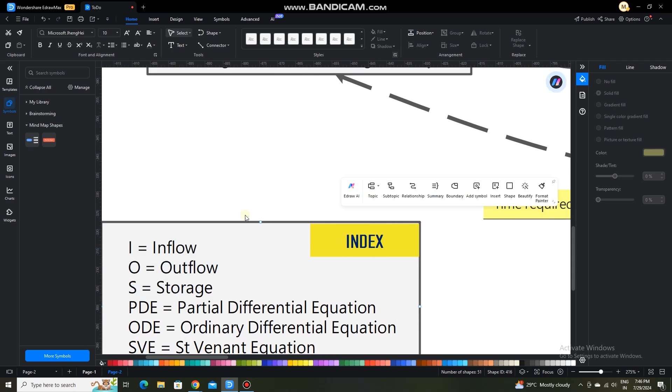And in this case, what we have also derived is the Muskingum equation: S is equal to K within bracket, xi plus 1 minus x, q. Actually I to the power m or q to the power m, that m is replaced by 1, which is normal for a normal catchment. X is your weighting factor that you decide, and K is the storage time constant having a unit of time - basically the timekeeper. So what is done is to put the value of K, value of x, value of I, and value of q to get storage, S.

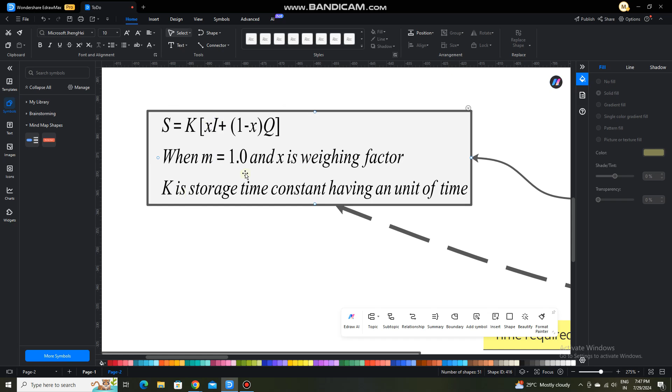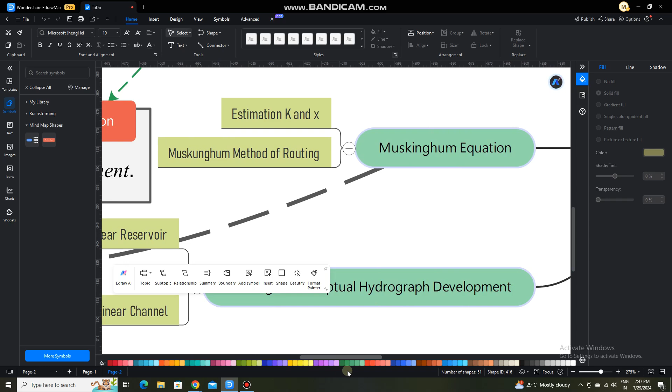So this is the theoretical discussion we have covered, and next is routing in conceptual hydrograph development. For this, you assume that all reservoirs are linear and all channels are linear.

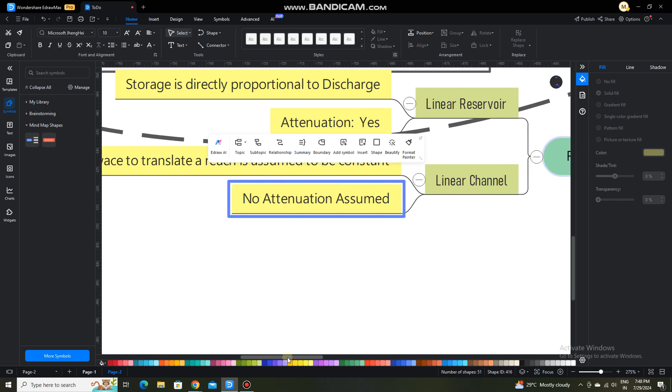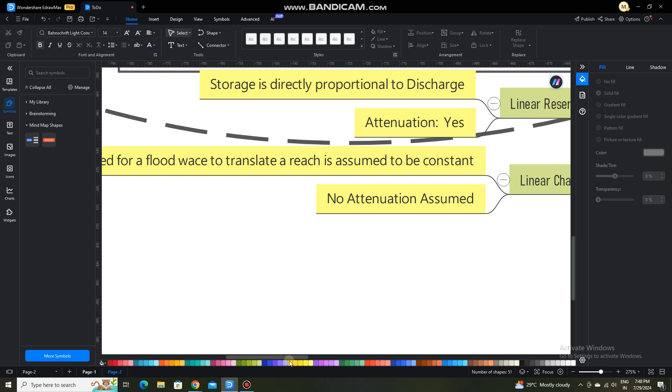If they are linear, then storage will be directly proportional to discharge. There will be attenuation in case of linear reservoir, and in case of linear channel there is no attenuation, only translation. That means the time required for a flood wave to translate in a reach is assumed to be constant. So the time is also made constant - not only m, the time is also made constant, and the k variable depends on time.

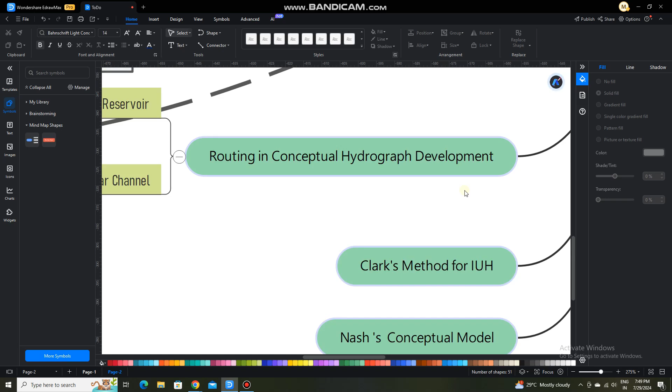In addition to this, there are two more classes or categories: one is Clark's method of IUH, which is instantaneous unit hydrograph, and Nash's conceptual model. So these two, and also how routing is done with the help of the Muskingum method - these three I will take up in the next class.

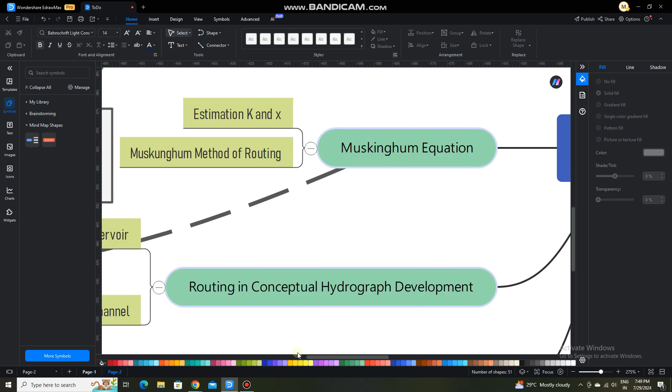So let us see what happened. So for now, this is the case.

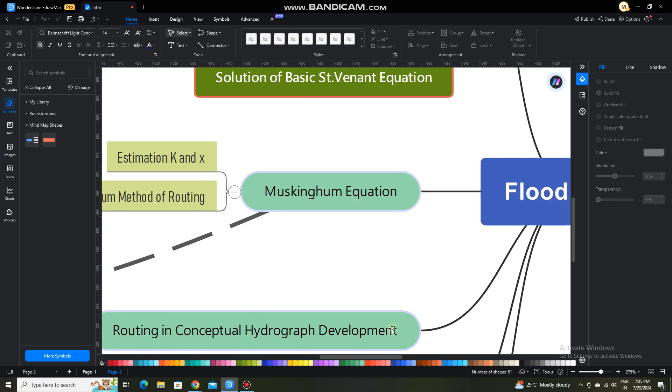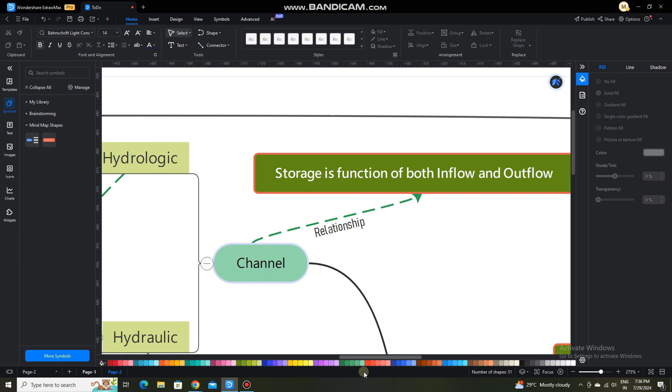Until now we have understood that flood routing can be divided into reservoir routing or storage routing and channel routing. Channel routing can further be divided into hydrologic routing and hydraulic routing. Channel routing is such that channel storage is a function of both inflow and outflow, not only outflow. For reservoir routing, storage completely depends on the outflow. So channel routing is dependent on inflow and outflow, and storage routing is dependent on outflow only.

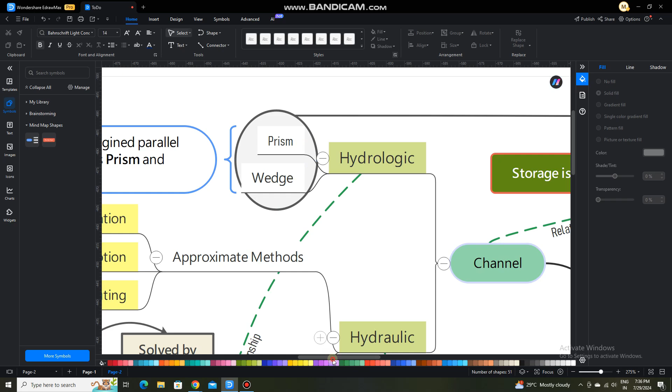Now this channel hydrologic routing can be further divided into prism and wedge routing. What is prism? If you imagine a surface parallel to the bottom of the river, then anything below this parallel water surface level is known as prism storage, and anything above this imaginary line is your wedge storage.

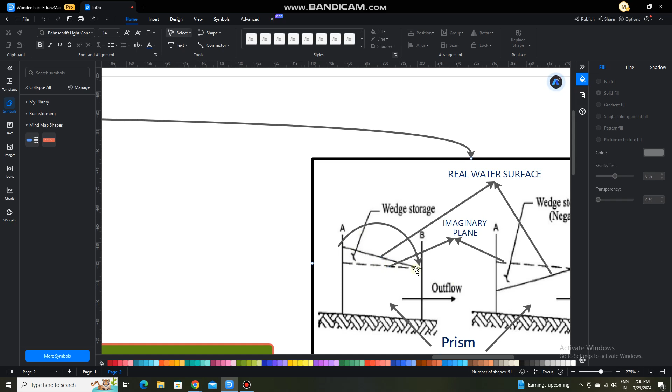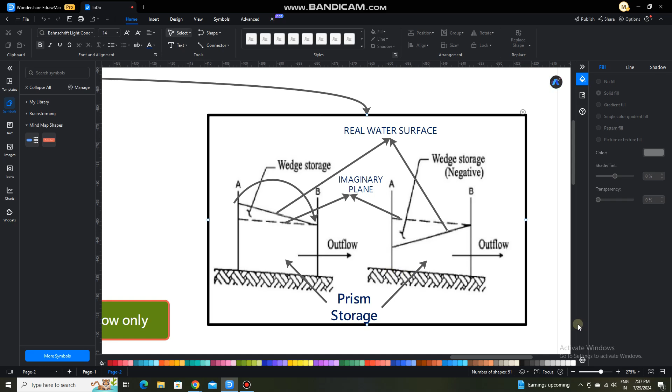However, if the real water surface profile is above this imaginary surface profile, it is known as positive wedge, and if the real water surface profile is below the imaginary water surface profile, it is known as negative wedge storage. This picture clearly shows what we mean: the continuous line is the real water surface, and the dotted line is the imaginary plane. Between these two planes is the wedge storage - positive if the real water surface is above the imaginary plane, negative if below. That is the idea of prism storage and wedge storage.

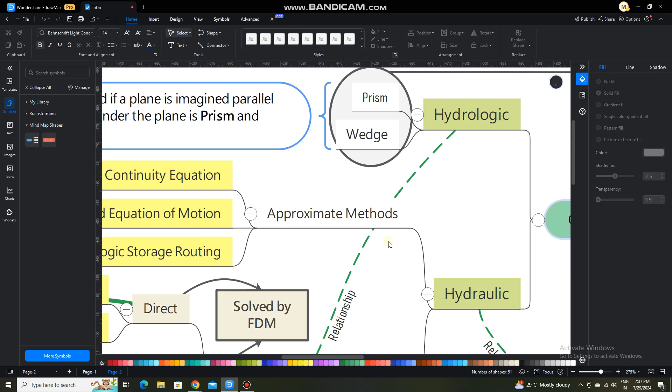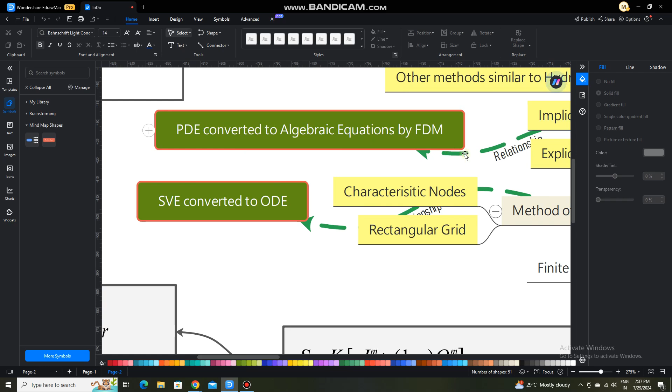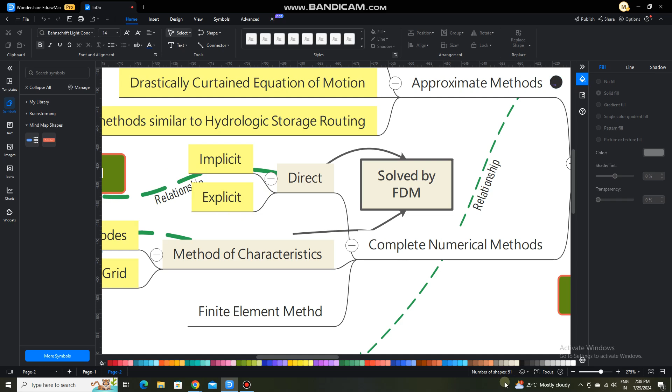Now this hydraulic routing can also be further divided into approximate method and complete numerical method, but the main thing is that you have to solve the Saint-Venant equation. When you are converting the Saint-Venant equation into an algebraic equation and solving it, then it is known as the direct method. Now if all the variables depend upon the independent variable, which is time or space, and both input and output belong to the same time or same space, then it is implicit. If any one of them is out of the time domain or out of the space domain, then the equation is known as explicit. So overall it is clubbed under the direct method.

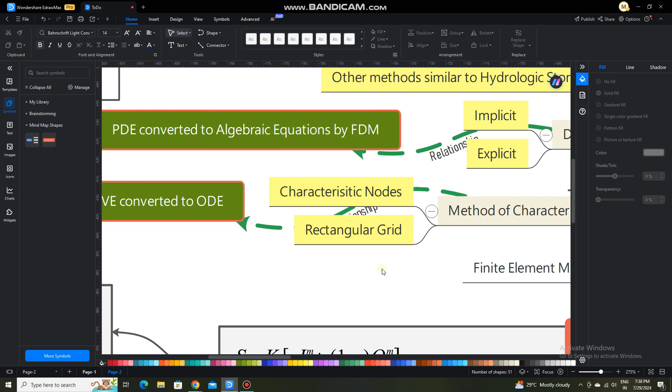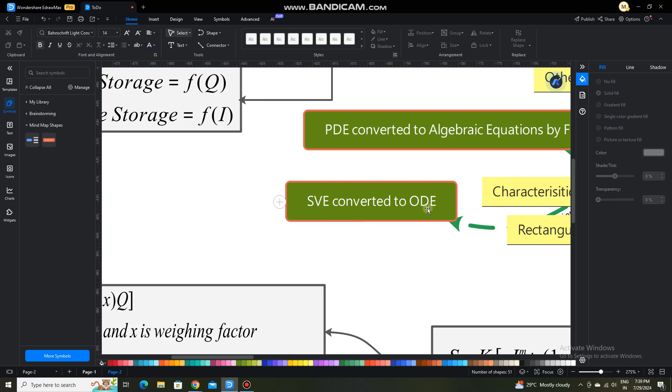Now method of characteristics is there. This is also a complete numerical method. So in method of characteristics, you also have to solve the Saint-Venant equation by dividing it into multiple nodes or multiple grids, and then solving it. So here nothing but the Saint-Venant equation is converted into multiple ordinary differential equations, and they are solved as per rule.

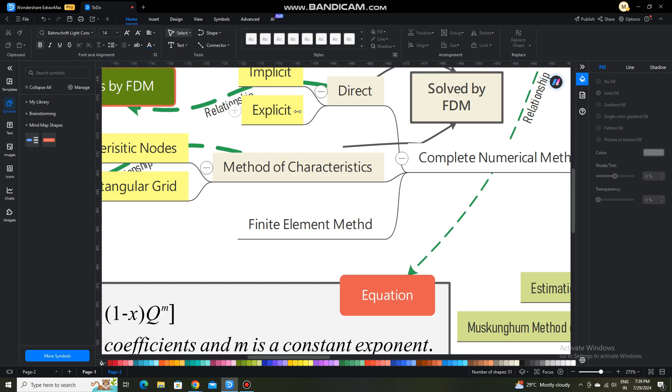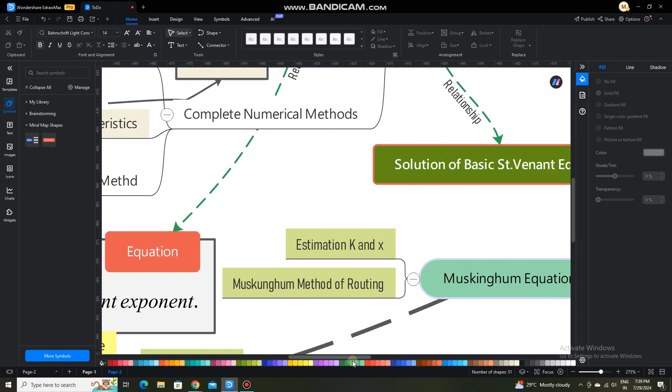What is channel routing, not hydrologic routing. Now comes your question of what is the Muskingum method and its equation. So storage in the channel depends on both inflow and outflow. So we have devised the equation like this.

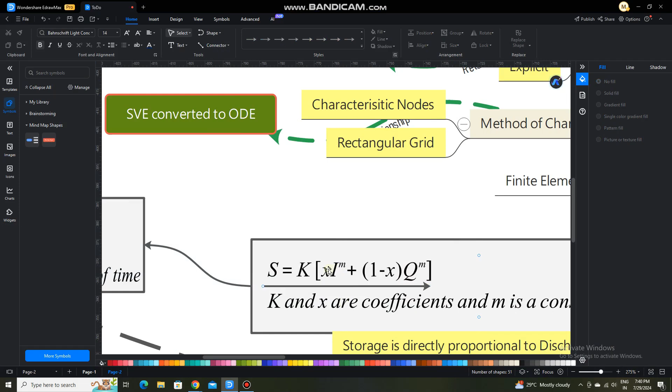S is equal to K within bracket x into I to the power m plus 1 minus x into Q to the power m, where m is a constant exponent, and x is an imaginary variable or imaginary coefficient, and so is K. Now K depends mainly on the time of concentration or traveling time of the flood wave, and x is basically the weighting factor. That means it gives weight to inflow and outflow.

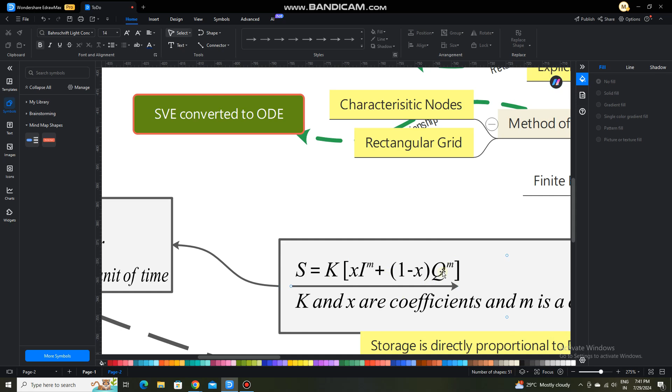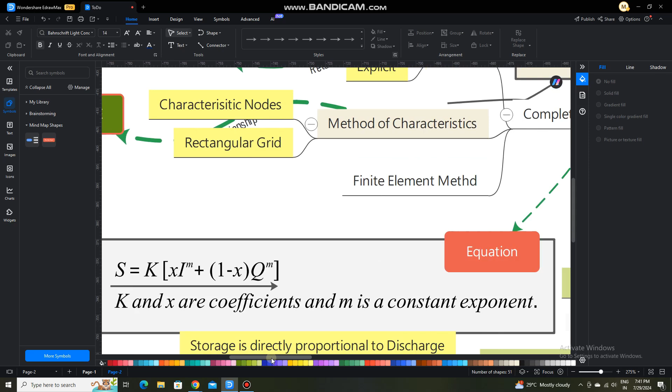That means how much weight you are giving to your inflow value and how much weight you are giving to your outflow value. So by the equation you can say they are giving greater weightage to outflow than to inflow, because in case of channel routing they are mainly controlled by the outflow. There is not much effect from inflow. That is why prism storage is a function of this channel routing only, that is Q, whereas this one is not affected.

So this I is inflow. In case of channel routing, what happens? Inflow is taking part, but not as much part as the outflow is. That is why this x, or weighting factor, is for I, and 1 minus x, that is the remaining weightage, is for Q. Although from x and 1 minus x you cannot understand which one you are giving higher weightage. So this is the overall equation: S is equal to K into x I to the power m plus 1 minus x Q to the power m.

So if we assume that m is equal to 1, which is the case in real life, all the watersheds have m equal to 1, and x I have already discussed, it is a weighting factor. So K is the storage time constant having a unit of time. So all these things, what I want is that you understand what storage is in channel routing.

Storage in channel routing is: some amount of water is coming from upstream as inflow, and some of the water is going out at the same time from downstream. So this difference of time and volume will give you the storage. And if we assume m to be 1, and x is the weighting factor, then S becomes K into xI plus 1 minus x into Q.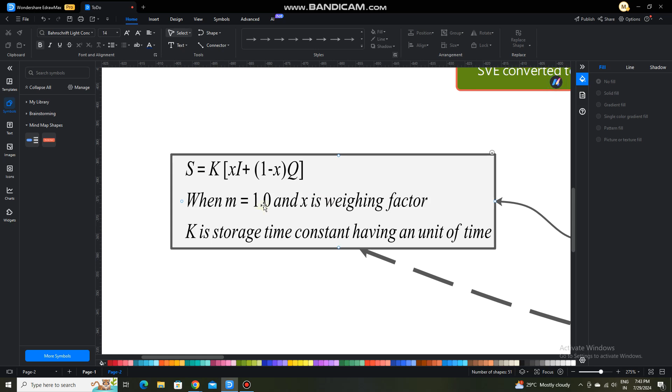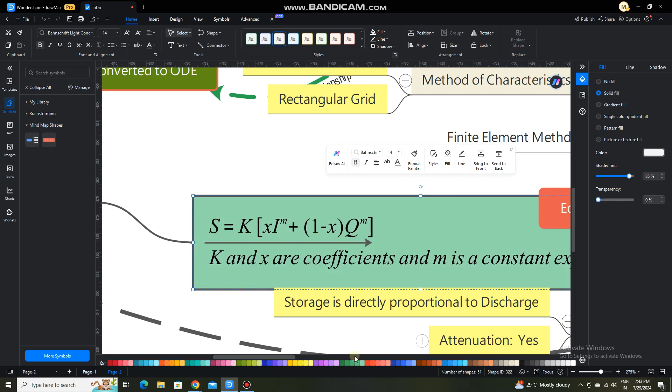So if m is equal to 1, then in the same equation, without this constant exponent m, the equation becomes: storage S equals K, the storage time constant, into x into I plus 1 minus x into Q. So this is the case, and this equation is known as the Muskingum equation: S equals K times x I plus 1 minus x multiplied by Q. So actually they have reduced the weightage of discharge in this process.

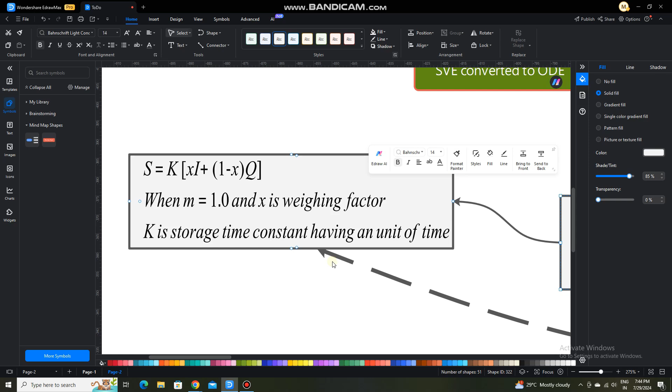Now the next concept is how to develop conceptual hydrological models.

Okay, so there are two types of reservoir, let's start by debriefing you. One is linear reservoir, another is reservoir linear channel. So one is this one, linear reservoir, another one is linear channel.

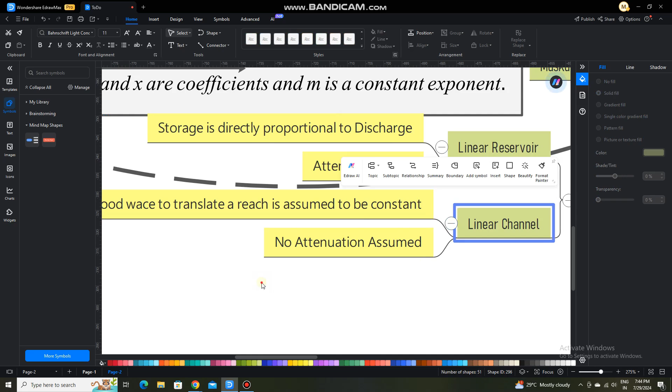In case of linear reservoir, the assumption is storage is directly proportional to discharge, just like hydrological routing. And there are attenuation. Remember, in case of reservoir routing, attenuation is common because the water is coming from a channel to a reservoir, so its width changes. Its peak will be below the imaginary water surface profile.

That is why at that time in the downstream it is known as negative wedge storage. So S subscript P indicates the prism storage. Now here is another catch.

In case of prism storage, you see with distance, if the depth is same, I have said that prism storage is assumed to be uniform. So from where can this storage be diminished or used, the water stored in prism, how can we use it? Only through the outflow. Because as there is no incoming of water, the depth of the water surface level is not changing, that is what we have assumed. So if we want to change that depth, we have to open the outlet so that water can flow away through the outlet only.

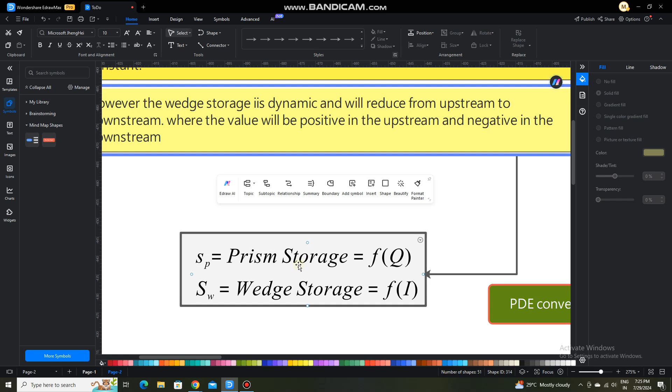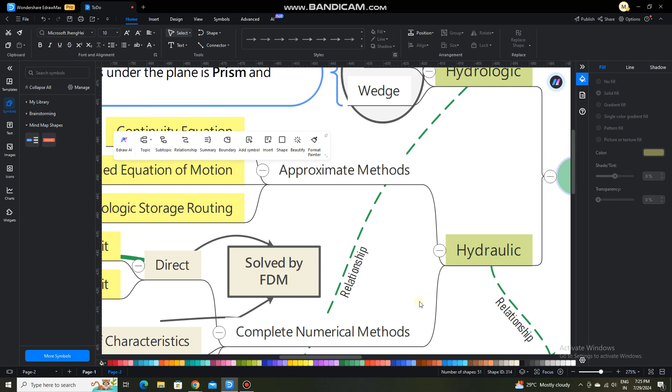That is what prism storage and wedge storage is, and both are under channel routing, and channel routing is further divided into hydrologic and hydraulic routing. In the hydrologic routing, there are prism storage and wedge storage. Prism storage is the water stored under the imaginary water surface profile, which is parallel to the channel bottom but imaginary, and anything above that imaginary surface profile constitutes the wedge storage.

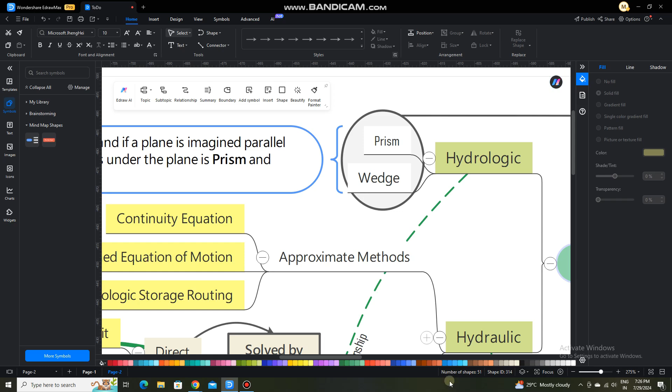So basically, wedge storage can be positive if it is above the imaginary water surface profile, and can be negative if it is below the water surface profile. But there is no such case in prism storage, because for prism storage we have assumed that the depth will be uniform throughout the channel.

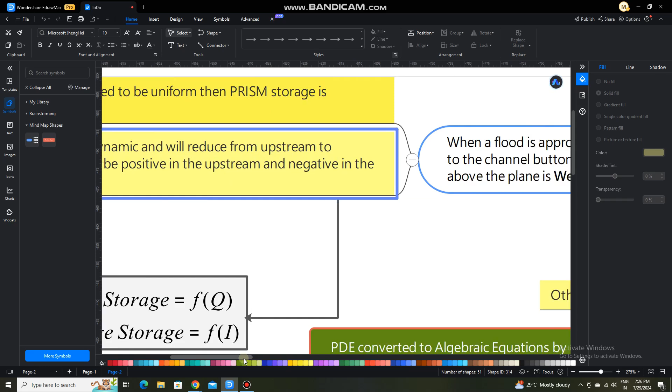Okay, now for hydraulic channel routing, there are two different types of channel routing you can observe. So what are they?

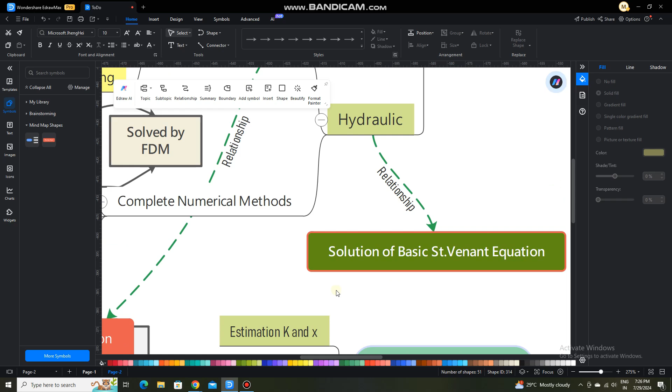So they are known as: one is approximate method, another is complete numerical methods. In hydraulic routing, we try to solve the Saint-Venant equation. What is the Saint-Venant equation? You can search the internet. It is a simple partial differential equation which we try to solve for given initial and boundary conditions.

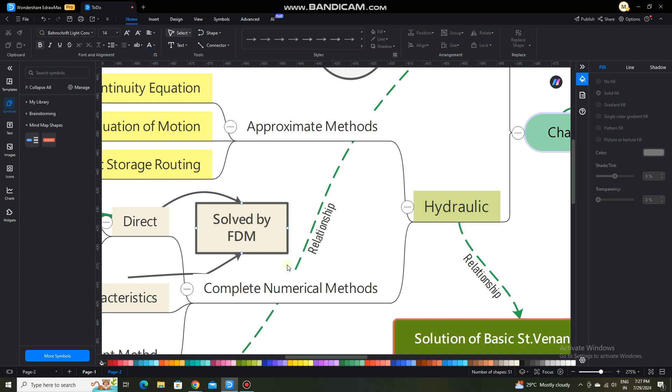In case of approximate methods, there are three different types. One is solving the continuity equation. Second is solving the drastically curtailed equation of motion. Third is other methods similar to hydrologic storage routing.

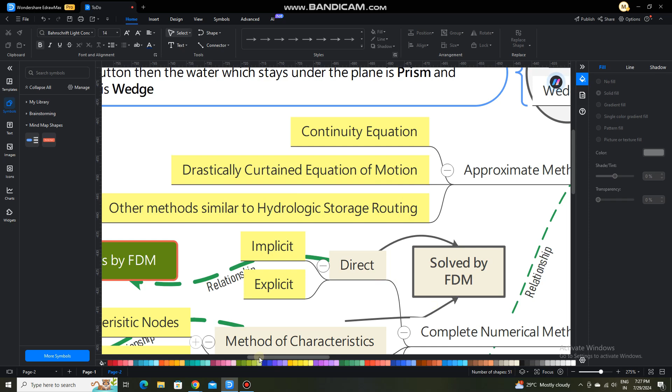About hydrologic storage routing, there is level pool routing, Goodrich routing, and standard fourth order Runge-Kutta routing. There is also the modified Puls method. These are the three main, most popular methods of hydrologic routing.

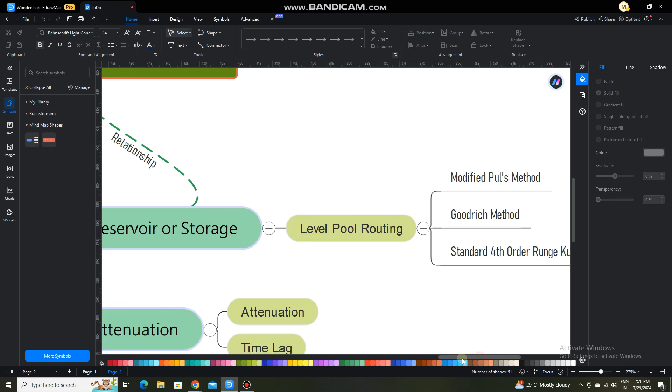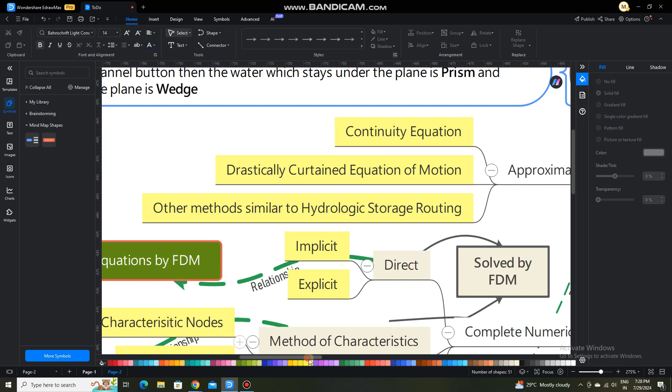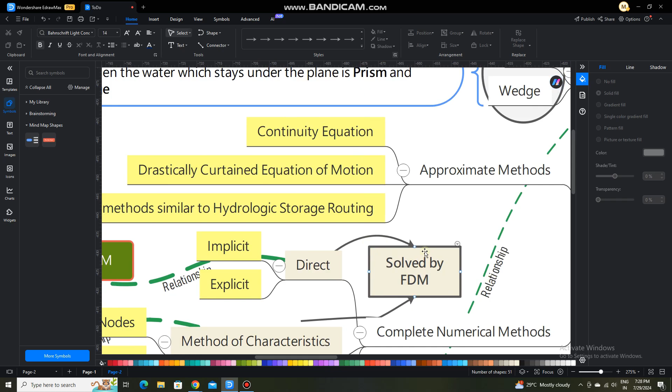So those methods are also clubbed under the approximate methods. And yes, of course, you can solve the continuity equation or the drastically curtailed equation of motion. These are all approximate methods, not exact methods.

In case of complete numerical methods, there are three different methods. One is direct method, another is method of characteristics, and another is finite element methods.

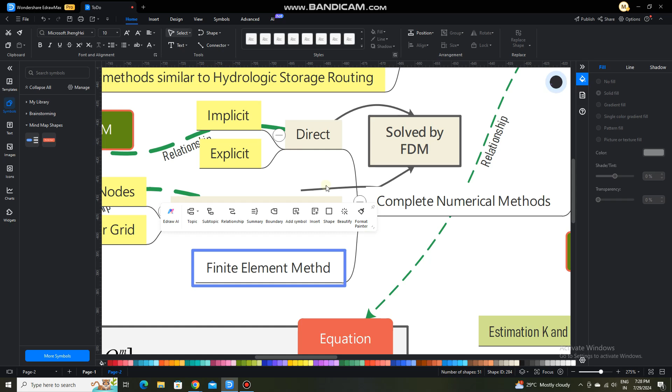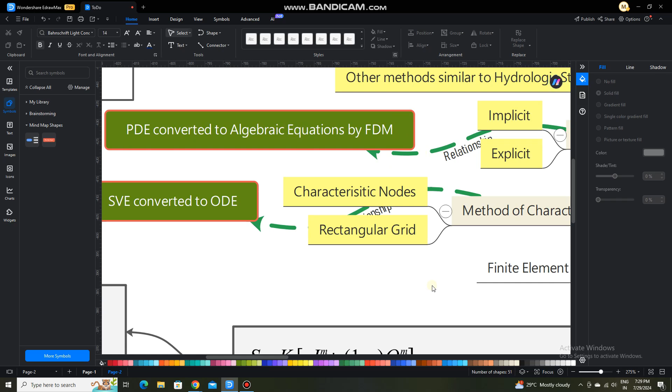In case of direct method, you can further subdivide it into implicit method and explicit method. All these direct methods are nothing but partial differential equations, or PDEs, converted to algebraic equations by FDM, finite difference method, and then there are specific discretization rules with which those equations are solved.

If you are solving in the same domain, meaning the variable you are predicting and the input with the help of which you are predicting the output are in the same domain, time domain or space domain, then it is implicit. If one of them is out of that domain, then it becomes explicit.

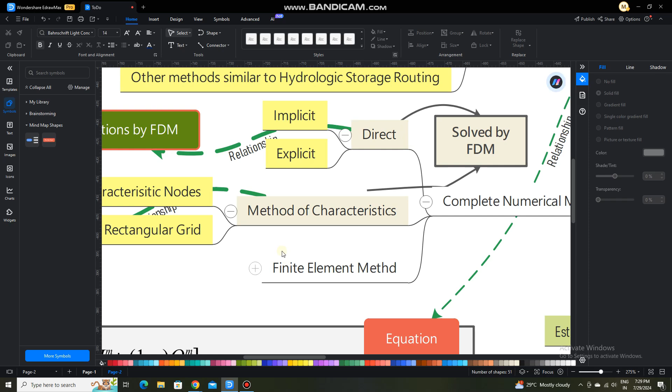Now, direct method is one, method of characteristics is another. This method of characteristics can be further subdivided into characteristic nodes and rectangular grids. Here also the simple Saint-Venant equation, which is a partial differential equation, is converted to an ordinary differential equation, and then it is discretized and solved by discretization methods.

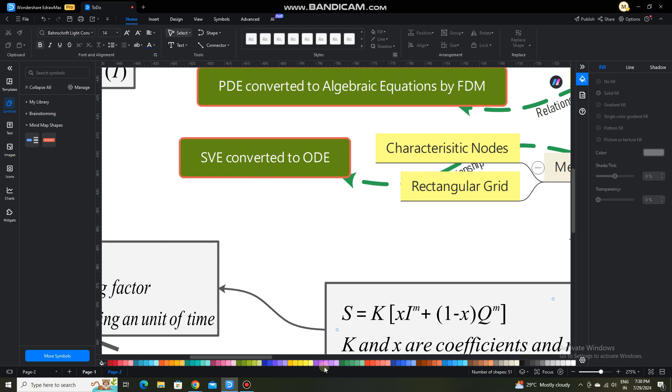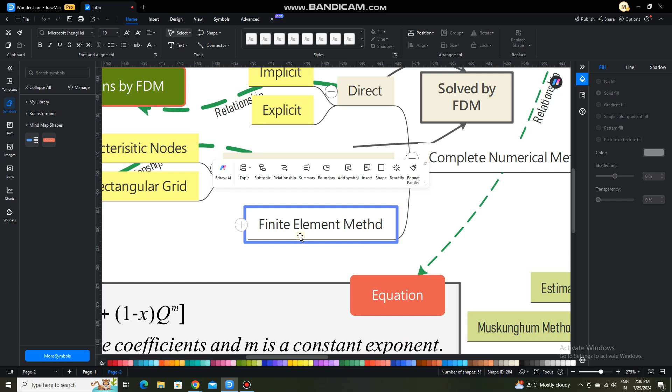And lastly, this is the finite element method that we already know about, and I will share a link about this in the description of this video.

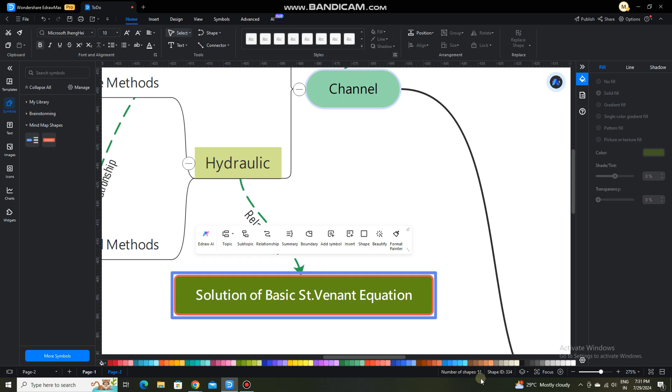So now let us see. We have hydraulic routing, we know what it is. Hydraulic routing is nothing but the solution to the basic Saint-Venant equation. Based on how we solve it, you can categorize it into approximate methods and complete numerical methods.

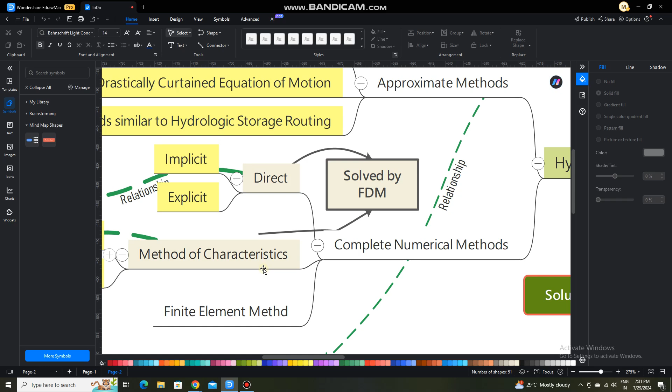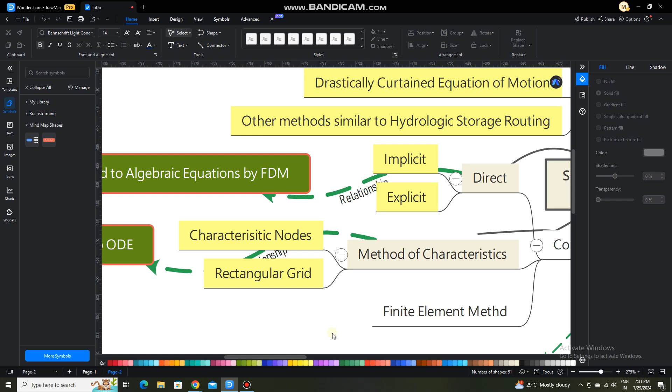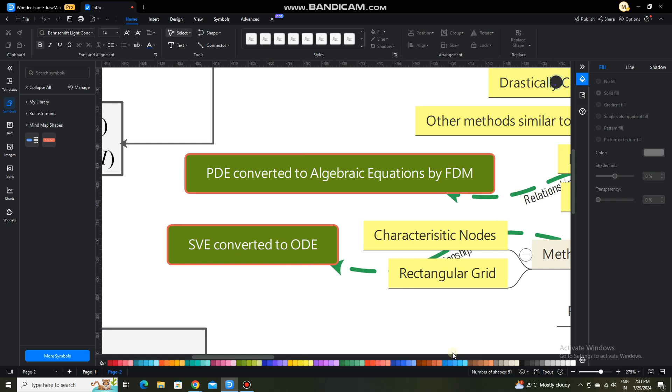In case of complete numerical methods, the direct method and method of characteristics are solved by FDM, and the remaining one is the finite element method. Direct method can be implicit or explicit, based on the position of the variables in the time or space domain. Method of characteristics is further categorized into characteristic nodes or grids, meaning you can solve it either by discretizing into nodes or by discretizing into grids. Either way is allowed, and the Saint-Venant equation is converted to ODE, ordinary differential equation. So this is what the lecture is.

Now let us see, to solve the hydraulic routing, flood routing, under the complete numerical method, there is an equation to solve.

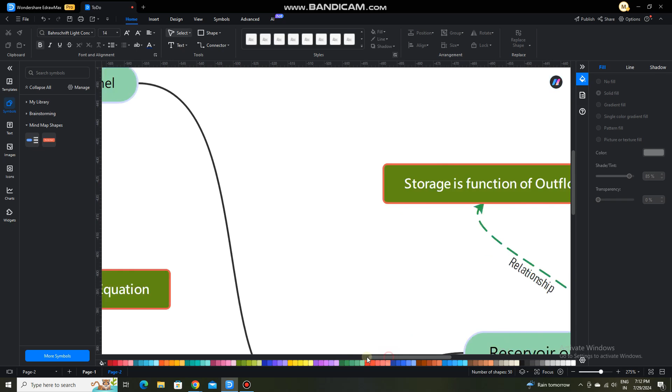As you know, flood routing can be divided into reservoir or storage routing, where the flood wave is coming inside a reservoir or a storage structure, and another type of routing is channel routing, or canal routing, or river routing, where the flood wave is coming from the upstream and going out through the downstream.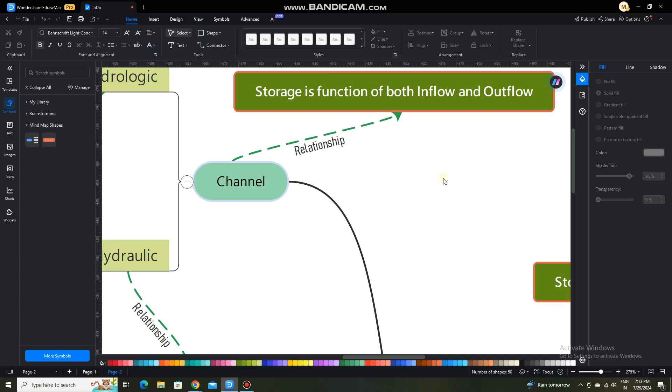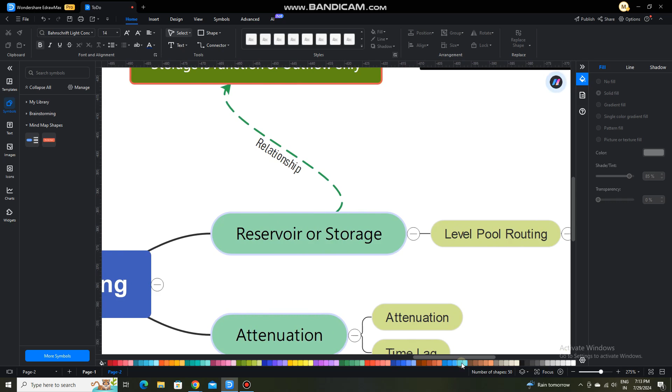So that is why, in case of reservoir routing or storage routing, which is also known as level pool routing, the storage is a function of outflow only, because whatever has come inside has created the storage. If you pour some water in a bowl, that water will increase the water stored in that bowl. But if you create a hole in the bowl, then the water will come out of the hole as an outflow, and how much outflow will come depends solely on the storage.

Suppose you have cut down the inflow, but storage is already there. Now suddenly you have opened the gate of the reservoir. Whatever amount of water is there, it will try to come out. If you do not close the gate, it will continually come out of the reservoir. So that is why, in case of reservoir or storage routing, the storage is a function of outflow only.

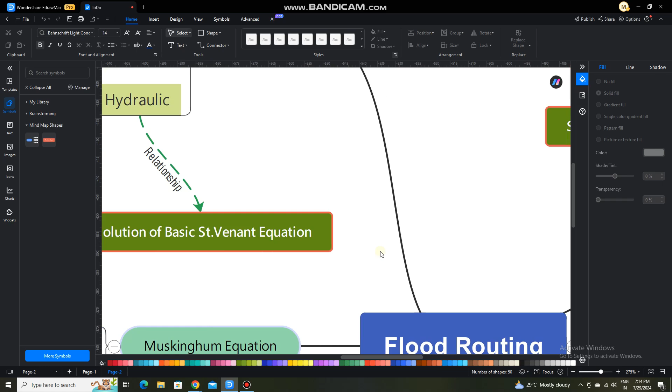In case of reservoir or storage routing, however, if you consider the channel routing, then channel routing is a function of both inflow and outflow.

Why? Because whatever amount of water is coming inside an open channel, that amount of water minus the evaporation and infiltration, or conveyance loss to be precise, the remaining amount of water will only contribute to the outflow. And this difference between inflow and outflow will create the storage.

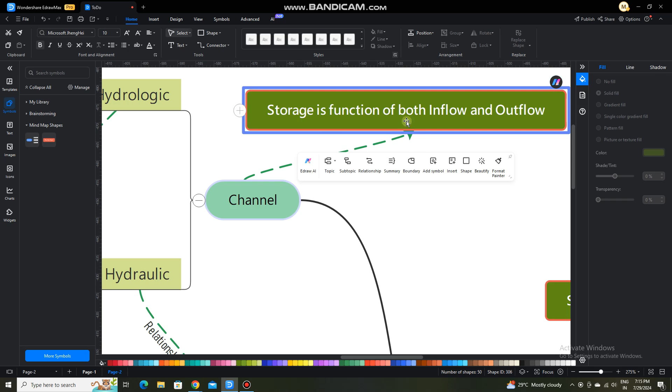So channel routing, or the channel storage, is a function of both inflow and outflow. And reservoir routing, or reservoir storage, is a function of only outflow. Keep this in mind.

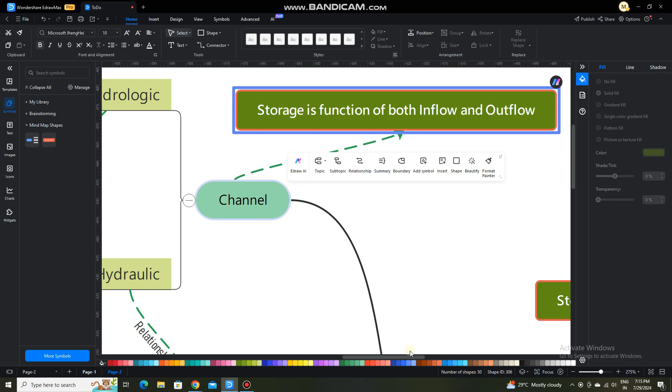Now channel routing can be further subdivided into hydrologic routing and hydraulic routing. Now, in case of hydrologic routing, what happens? There are two different types of hydrologic routing that can be observed: one is prism, one is wedge.

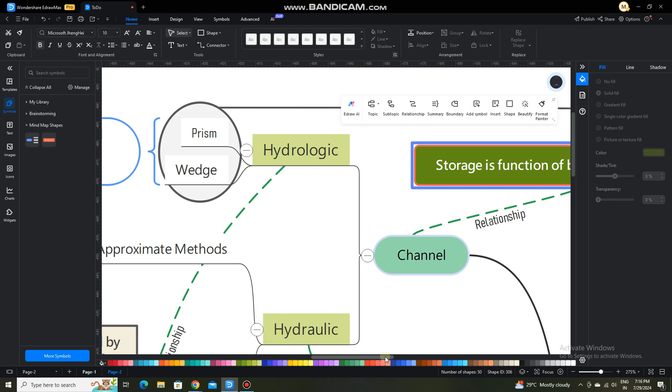Now, if you imagine a parallel plane, or a plane parallel to the channel bottom, anything above this imaginary plane is known as wedge storage, and anything below this plane, which does not change with the change in distance or depth, is indicated as prism storage.

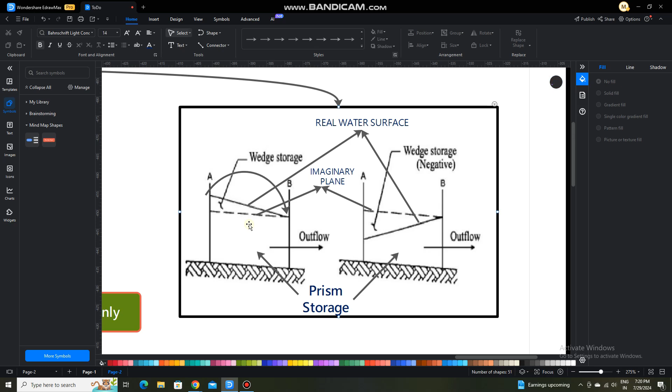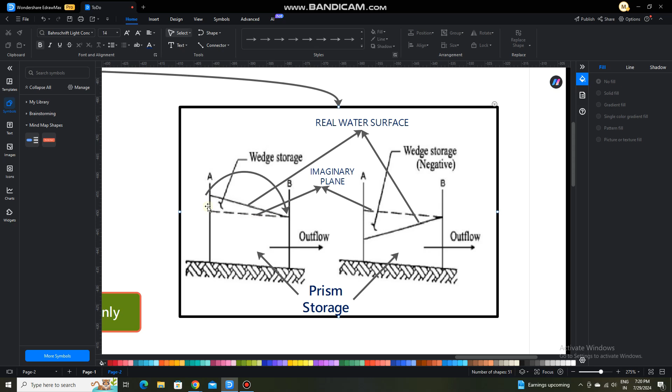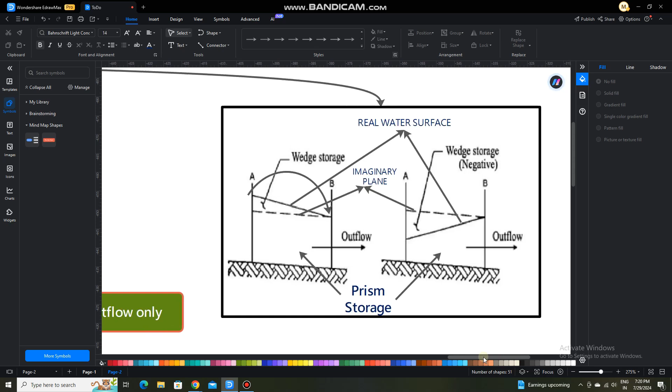then the difference between these two water surface levels is indicated as positive wedge storage. And if the real water surface is below the imaginary water surface, then that difference in level is known as negative wedge storage. And the water which is below the imaginary water surface profile is known as prism storage. Okay, so this is what is known as the prism storage and wedge storage.

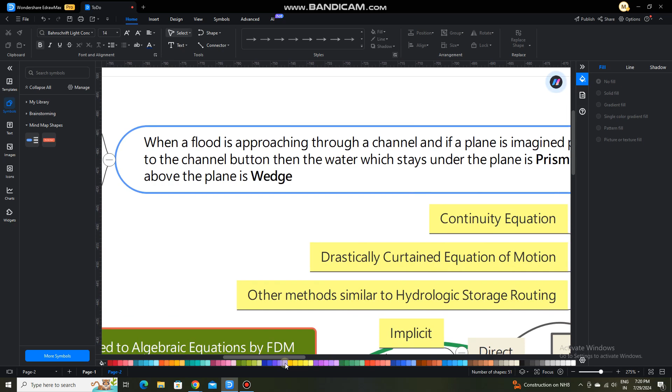So that is why it is written that when a flood is approaching through a channel, and if a plane is imagined parallel to the channel bottom, then the water which stays under that imaginary plane is prism storage, and above the plane is wedge storage.

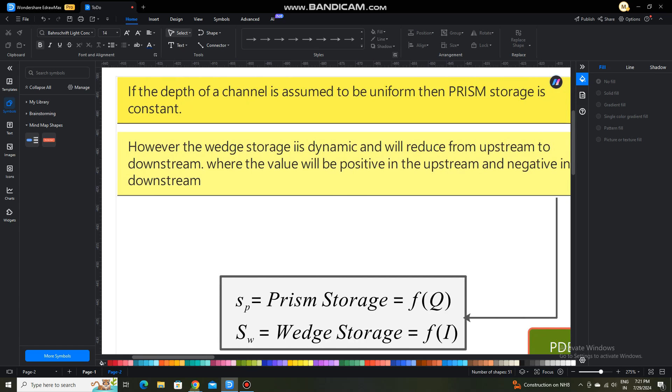Now what will happen is that if the depth of the channel is assumed to be uniform along with the distance the channel has traversed, then the prism storage is constant.

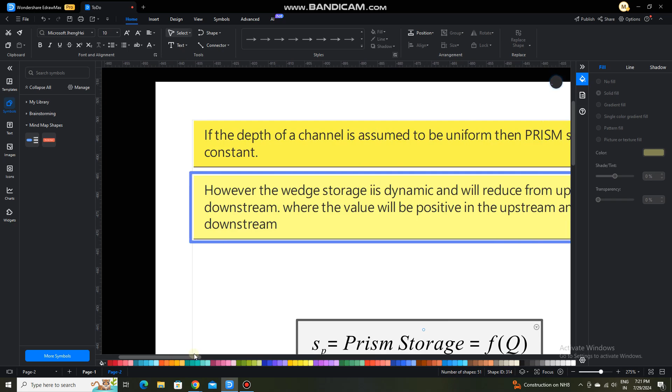However, wedge storage is dynamic, and it will reduce from upstream to downstream, where the value will be positive in the upstream and negative in the downstream.

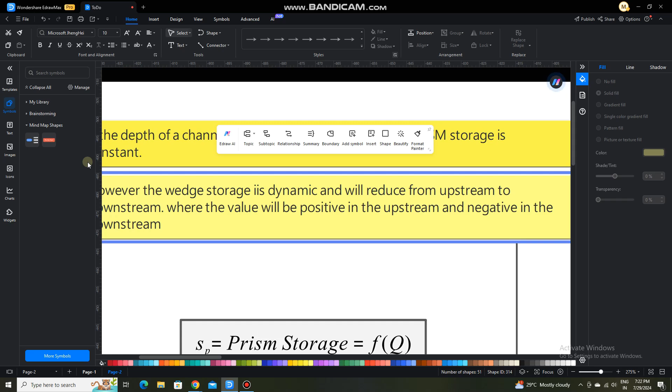Why so? Because in the upstream the flood wave has entered, so its peak is much more than the existing water level, that is why it is above the imaginary water surface profile, so it is positive wedge storage. But when it is going to the downstream, due to the convective loss and also energy loss,